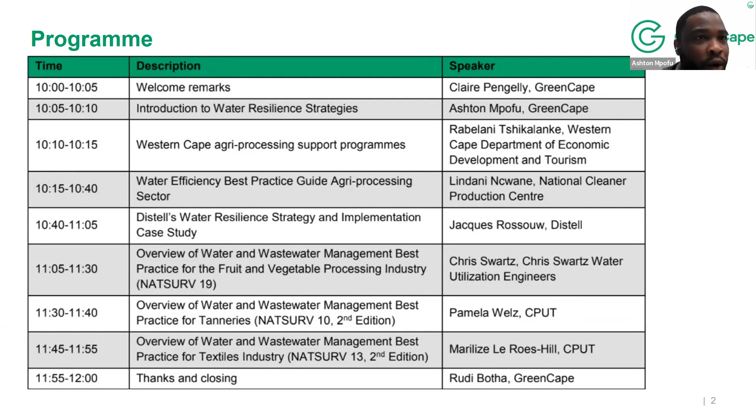Thanks, Claire. I think Claire is having troubles with the connectivity, so maybe let me kickstart my part. Good morning once again. My name is Ashton, and I'm also a water analyst at GreenCape. So I'll be taking you through what we have termed the water resilience journey. This is the work that comes from what we did.

Okay, Claire is muted now. So I'll take you through what we have termed the water resilience journey. Okay, Ashton is going. Okay, thanks, Claire, apologies, we have been breaking up a bit. So I just jumped over to start off my session. But thanks once more for the introductions.

As I've introduced myself, my name is Ashton. I'm also a sector analyst at GreenCape. So I'll take you through what we have termed the water resilience journey. This comes from the work that we did during the drought, where we engaged different businesses and encouraged or supported them in terms of how to become water resilient during the drought.

So I'll take you through the four steps, starting off from your far left, which is what you call understand water uses and risk. The journey starts from your left to your right, which is all about low cost activities or interventions on the left. As you go further to the right, the cost increases, as well as the complexity.

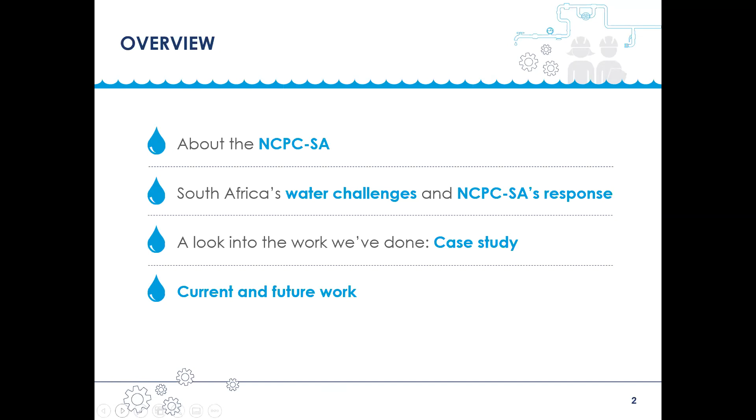Just to give you a background of who is NCPC, we are a National Cleaner Production Center of South Africa. We support South African industry to improve competitiveness and reduce environmental footprint. We do that through implementation of RECP methodologies, as a program of the Department of Trade, Industry and Competition. We are hosted within CSIR, the Council for Scientific and Industrial Research.

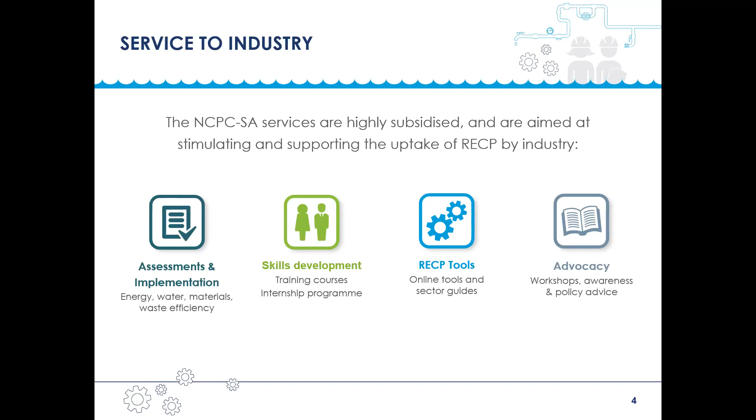The services we offer to industry are highly subsidized, and the aim is to stimulate and support the uptake of RECP by industry. We do that through assessment and implementation, where we get case studies. Also through skill development, where we've developed training courses on various thematic areas. We've got RECP tools which are online, as well as sector guides that we've developed, which are also online. Also through awareness, policy advice, and various workshops.

In terms of the flagship projects that NCPC is driving, we've got 3 areas: water, which is the industrial water efficiency project. The second one is material and waste - we've got a program called the Industrial Symbiosis Program. And under energy, we've got an industrial energy efficiency project.

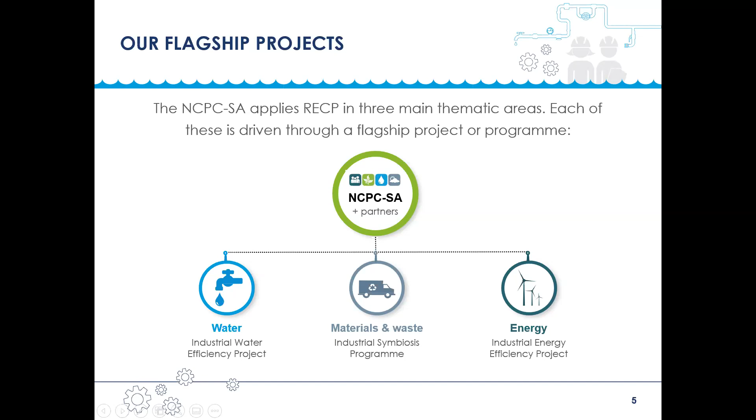I want to take you through the water challenges, as well as what NCPC has done in response. As you know, South Africa is a water scarcity country with extended drought, as well as aging water infrastructure - we've got really a big problem in that. Also, there is inconsistent policy and regulation, preferential effluent charges for high volumes that we typically see, unreliable water supply and quality coming from the water system in South Africa. Also, there is very limited investment in water efficiency measures and programs, and limited knowledge and skills in water conservation, as well as effluent management.

As you can see, what is highlighted on this graph is the cost of intervention. The second one, which is the second cheapest one, obviously is water use efficiency - just like Ashton has shown in his presentation. The first, obviously, is water loss control, where if you can fix water leaks, you can easily beef up your water supply and reduce your cost. As you can see, water efficiency is the second biggest response opportunity after loss control. So that is basically the low-hanging fruit that industries can use.

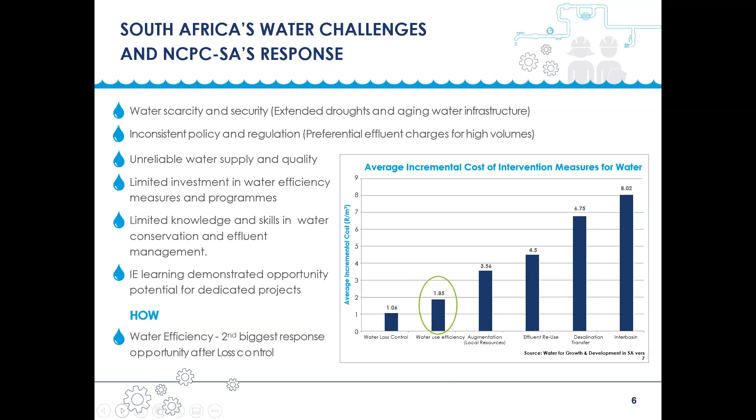Also, in terms of the water challenges and what NCPC has done, NCPC has embarked on creating a project within NCPC. We launched the project early in 2017 with different types of partners.

The program has got 5 areas. The first one is to facilitate and enable policy environment - we've done that one. The second is establishing and promoting the adoption by industry of national and international standards for water management. The third is development of relevant skills to support the implementation of water efficiency through training. The fourth is to support industry plants to implement water efficiency and demonstrate the benefit by doing that. The last one is to deliver focused advocacy as well as awareness campaigns to again promote the adoption of water efficiency by industry.

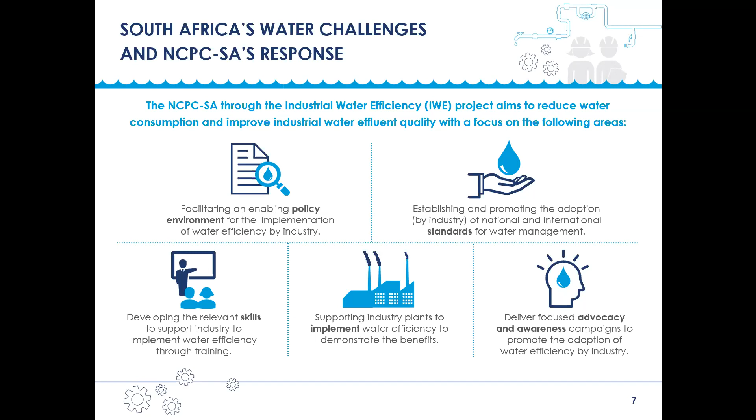So this basically has been our response to this end. We've got delivery partners that we work with: the Water and Sanitation Department, the CSIR, the Council for Scientific and Industrial Research, the Water Research Commission, as well as the Ministry of Foreign Affairs of Denmark. We signed an MOU back in 2017, like I've already mentioned. Also, we've got other international partners, which is the IFC, International Finance Corporation.

So I will just quickly take you through a very good success story in South Africa. Back in 2016, we engaged with a company - they were having quite high water usage. We engaged with them and started to understand exactly where we could offer support. The site details: it's a chicken processing facility located in the Northwest province. They were having problems with increasing water costs, yearly between 18 to 20%, which meant they were really in a tight corner.

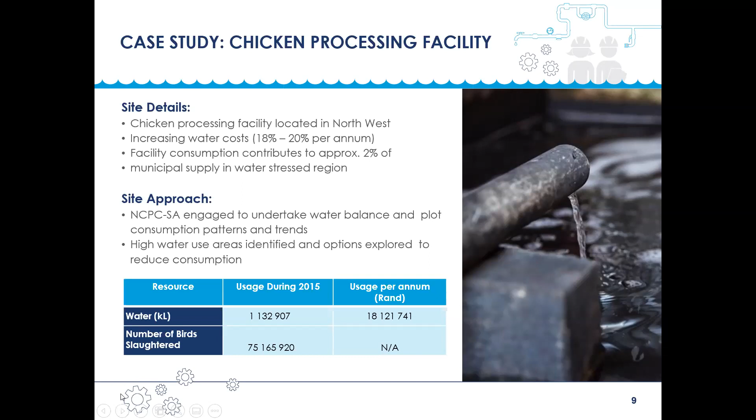For this one specifically, they followed through. The next following year, they implemented 3 of our recommendations, and really did not spend much on capex. They only spent a few thousand within their maintenance budget.

The first intervention they did was the installation of a shut-off valve at one of their sections, and upgraded their water system as well.

After that, they raised awareness within the facility to make sure the water is not left open, and all the leaks are being fixed. They fixed the leaks, especially on the hot water system, and that also helped them reduce their cold water use, and the results were really immediate.

The results were immediate. The last thing they did was, by doing those two, meant they managed to reduce their water consumption by over about 17%. That also meant they managed to reduce their effluent volumes, because they reduced their water consumption for the site.

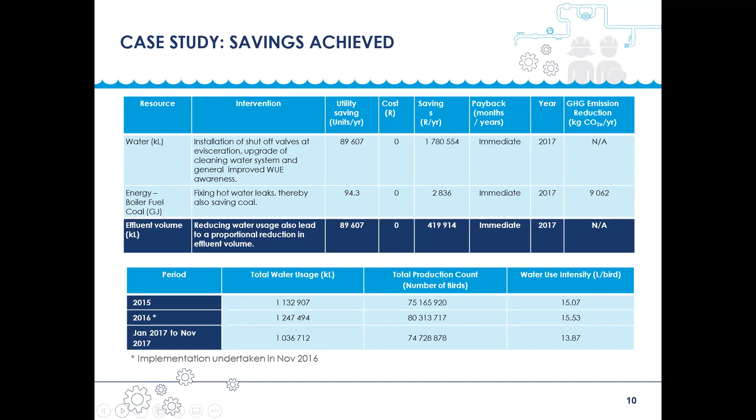Also, their water use intensity improved by 11% within a year, which was a very good implementation by the company, where they followed through on our identified recommendations and reaped the results. Now they've reduced their water consumption and are saving on cost as well, which is very encouraging and shows that our work and intervention really works.

So I'll take you through the current and future work we are working on. As Rudy mentioned, on the 17th, this coming Thursday, we are having an industrial online workshop on the 17th of February. You can register on our website, it's quick, it can take you 3 minutes to register yourself for that workshop.

We'll be sharing with the wider industry all our tools and sector guides that we've developed, which we've already published on our website. The first one is a water audit protocol that we've already published. The second is an Agri-Processing food processing guideline, having 5 common recommendations which can easily be implemented in any sector or business. We'll be sharing that thoroughly in that particular workshop.

Also, we've developed a qualitative water loss logging tool. We'll be sharing that on this day with all the people in industry. The third thing we're currently working on is water training modules. We will develop 2-day end user water training modules that cater for basically anyone in industry, from someone running the machine to even a business owner or CEO of the company.

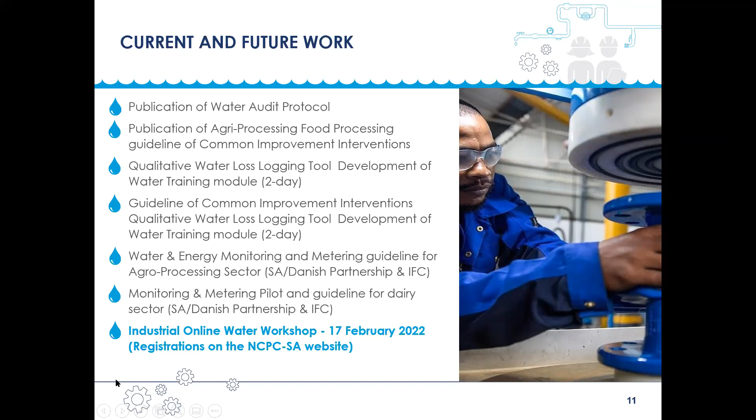Thank you very much, Lindani. That was a fantastic presentation, and we look forward to hearing more about your publications on Thursday. I have one question from my side, then I'll take questions from the audience. A lot of your case studies presented definitely showed a financial saving in each of them. Do you find that's a critical factor in making these water resilience projects successful, or could it be another initiative making it successful?

Yes, definitely, Rudy. One of the things we do when we come into a facility is assist them by plotting for the facility what we call a regression model, where we'll plot a model they can use to predict their water consumption on a monthly basis. That's the first and most critical step - we use the previous 12 months and create a baseline for them. Once we've created that baseline, we'll tell them typically for your site, your base load may be something like 20,000 kiloliters per month, just as an example, that you typically use.

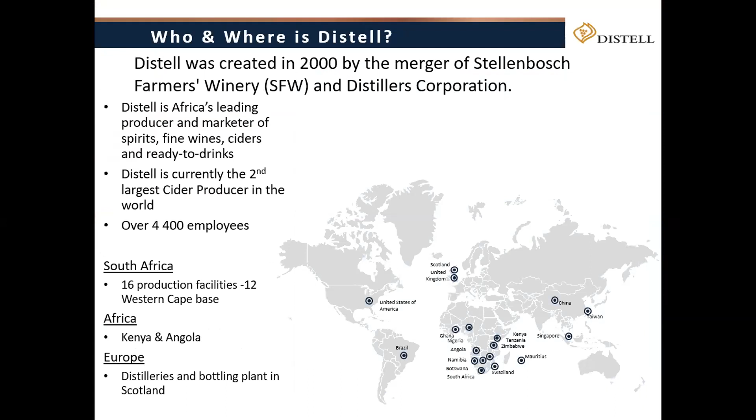So as a start, a snapshot of where we started. The work I'm presenting started in 2010 already, and we started off getting an understanding of what that baseline situation is. At the time, from a water use efficiency perspective, we were using about 4.2 liters of water per liter of packaged product.

Basically going from the point of final packaged products, understanding our processing. We do make wine at a certain time of year, and that product is then kept until it's packaged. So we worked on whatever is the final packaged volume versus what might have been produced throughout the year. So there is some seasonality impact as well.

Some of the initial work we did brought it down to 3.9, and we're now standing target for the end of this financial year just below 3 liters per liter of finished product. We obviously aligned this very closely to the Sustainable Development Goals around water use efficiency and water use.

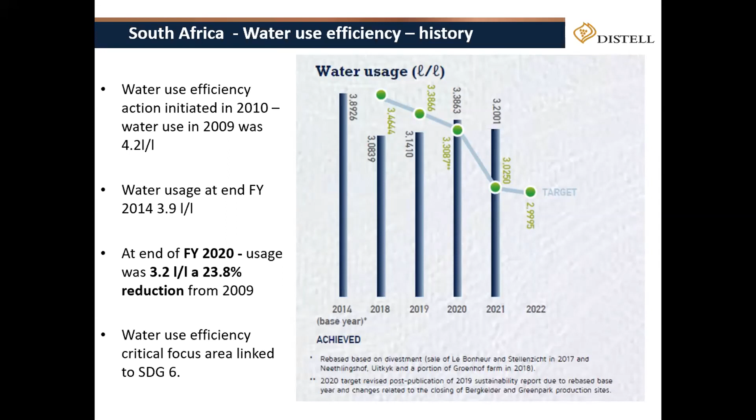So where we started off in 2010 - and I'm going to take you through this journey process we've gone through - we started by putting in a proper monitoring and reporting system. We made sure we have a duplicate monitoring system on our side and aren't fully dependent on municipal measuring systems. We put in centralized reporting systems so that all sites report centrally to our corporate center in terms of water usage.

We did full water network analysis around understanding water flows through the process. We put in sub-metering for areas identified as potential high water use areas, starting at site level, not just comparing a municipal meter to our own meter, but also comparing sub-metering to our own meter to understand where there could potentially be leaks or whatever the case may be.

So the first set of work was getting that baseline, and then from that we started looking at projects. These were typically projects identified internally of where we could reduce water usage, and there's a number of those.

So at the Springs plant, we recycled pasteuriser water use, which is reducing the temperature of the water and allowing it to be reused. There was recycling too - we've got reverse osmosis plants where we treat municipal water before using it in the final product. The brine stream from that is fairly clean, so we use that for washing our floors. If we buy in new bottles, we rinse the bottle before filling it with finished product - that bottle rinse water is again fairly clean, so we use it for washing floors, cooling towers, etc.

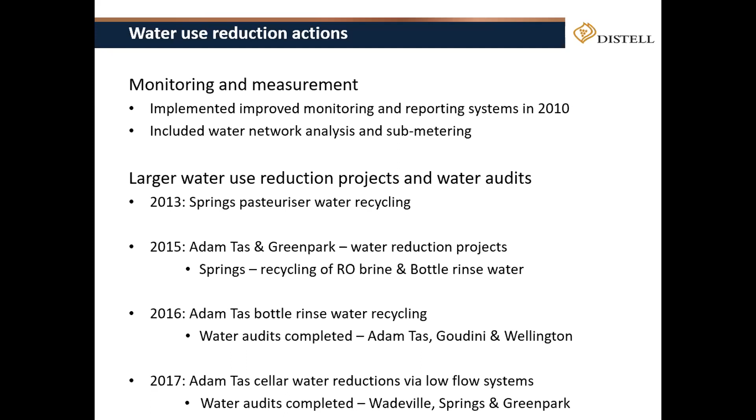And then we did work with - I think Lindani from NCPC also referred to that - we used independent engineering consultants and did water audits at all our major sites, effectively using the data we'd now built up, going through each process and almost getting a new view of where potential opportunities existed, to look at further opportunities to reduce water usage and for in-process recycling.

So we did some work with WWF, looking at the water risk of our different sites and understanding on a broader scale what is the risk of interruptions to water supply, both in terms of drought, precipitation and water availability, but also understanding where potential risks are in terms of municipal infrastructure and interruption of supply from that perspective.

Then we continued when we were in that sort of day zero drought scenario in the Western Cape. There was a lot of work done around further improvements, firstly in terms of reducing water use at those sites. So at our largest site at Epping, we had to temporarily relocate production. We put in closed loop cooling systems at one of the distilleries. We did major work around awareness programs.

We completed additional water audits at 2 of the sites, so we've basically done water audits at all our major production sites. We've developed a list of opportunities or projects at each of those sites, and on an annual basis we align that with our capital budget application process and implement those projects progressively at the different sites. That implementation program is also aligned to our annual water improvement target process, so projects identified for implementation will on a corporate side and on the site side lead to reductions for those specific sites.

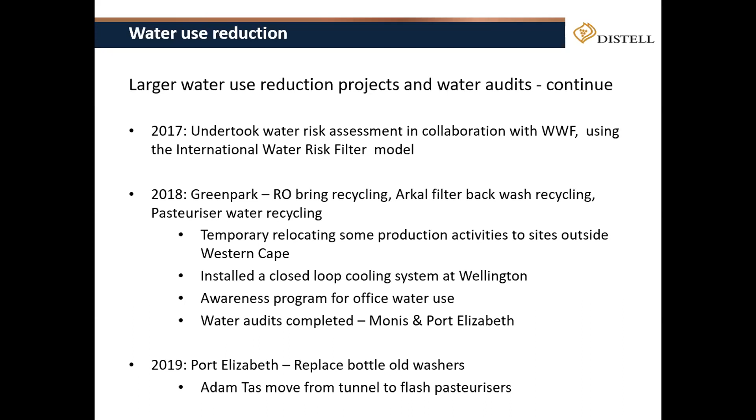And there was a question now about drought. The Eastern Cape is currently facing severe drought, so there's a lot of work we're doing there in terms of replacing old infrastructure. Old bottle washers have been replaced, and we've just completed a project where we're using the final rinse cycle from the bottle washers, putting it through our RO plant and reusing that back into the bottle washers again - that in-process recycling opportunity. That work is continuing at all the sites.

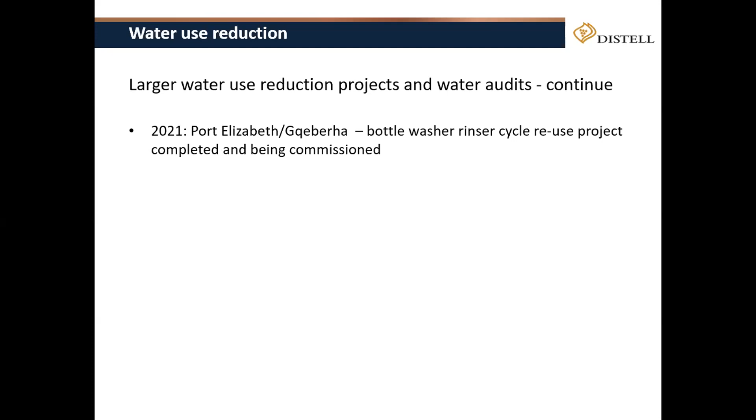But if we look at the Western Cape drought situation, the one advantage we had was that because we had started working on water use efficiency in 2010 already, we already had a fairly well-established baseline. We already had done water audits at the key sites. So when it became a regulation to reduce our water usage by 45% against 2015 as the base year, we already had a very good understanding of where those opportunities were.

We could fairly quickly implement potential process changes. Obviously, engineering interventions would require time for implementation, but because we already identified the project and there was already an indication of a cost element to it, we could pull projects forward and fairly quickly get approval for the capital to implement those.

So if we looked at all the different opportunities, firstly looking at internal reductions - although a lot of work has been done already - we started looking at alternative water sources, that included drilling of bore holes, safe yield analysis, application of water use licenses, water treatment processes, in addition to making sure that the water complies to our drinking water standards and internal product standards.

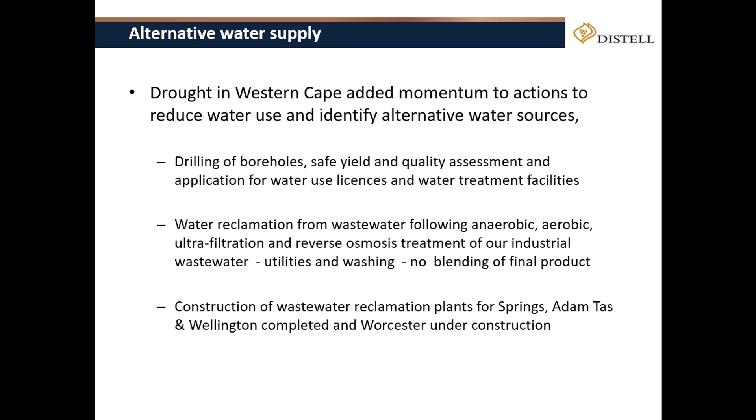We've gone through the process of completing full installation, level loggers, water meters, and started doing external quarterly monitoring reports for each of those boreholes. Based on the safe yield assessments and those quarterly monitoring reports, we've amended our management processes.

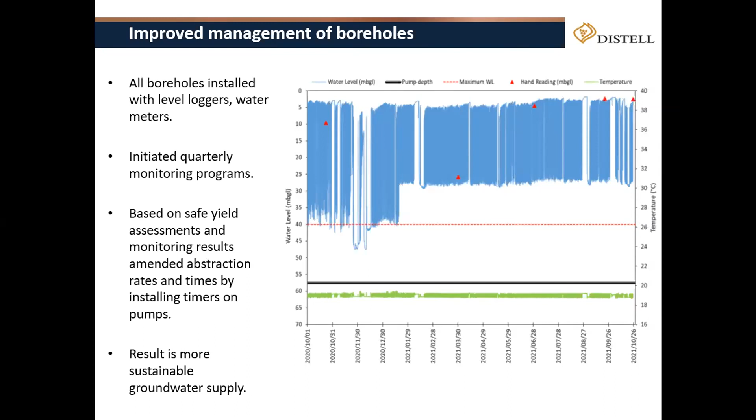We implemented these interventions not just at sites with a licensing requirement. We've now standardized this also for sites that were, in old terms, existing lawful use. So this is a standard practice now across all our sites where we have boreholes. We don't see boreholes as an unlimited supply - we try to manage it within the confines of what the resource can deliver for us.

So just two summary slides to finish off with. On a strategic level, the process we went through combined an evaluation of each site in terms of demand and existing supply or source of supply. We looked at potential alternatives - this is almost the more finished product - and we looked at opportunities to transfer water between sites. Remember, I'm not talking about the period when we were in the drought situation. We looked at opportunities for transferring water between sites, and we had to apply for water use licenses to give effect to those opportunities.

We looked at reclamation of wastewater, new boreholes - for each site we developed a site-level understanding of the situation. We combined this with results from the water risk filter work we had done, and then started implementing changes to ensure each site, from a risk perspective, has a more sustainable water supply program.

This gives us a one-slide summary of where we stand across at least the Western Cape and Eastern Cape sites. Obviously a lot of work has happened since this, so it's not the final version, but it gives you an idea. Each site we went into a fairly detailed analysis of that situation, and we keep doing this as part of our business continuity program.

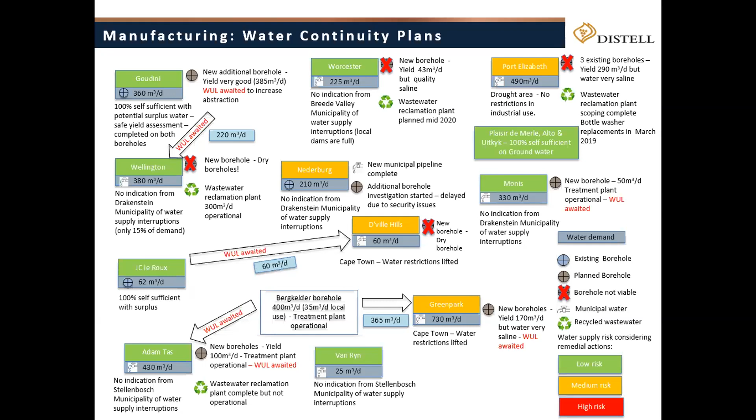From a Western Cape perspective, as I mentioned before, there was a specific legislative requirement to reduce our water usage by 45% against our 2015 base year. At the time we did a full analysis, understanding each site, the source, and the demand, and compared this to what sites had received from the Western Cape Municipal Supply System, or at least linked to it. We also looked at this across the Western Cape as a totality.

And as you can see, we were able to get to 45% against water supplied from the Western Cape water supply system, versus a total of 40% across the whole of the Western Cape. So a lot of successful work has gone into this process.

But I think the key thing for me is the fact that we had started early. If we had started this process by the time the drought was already in place, we would definitely not have been as successful. So I think that's maybe the one key thing to take out of it: don't wait too long until you're almost in trouble already, but start early with this.

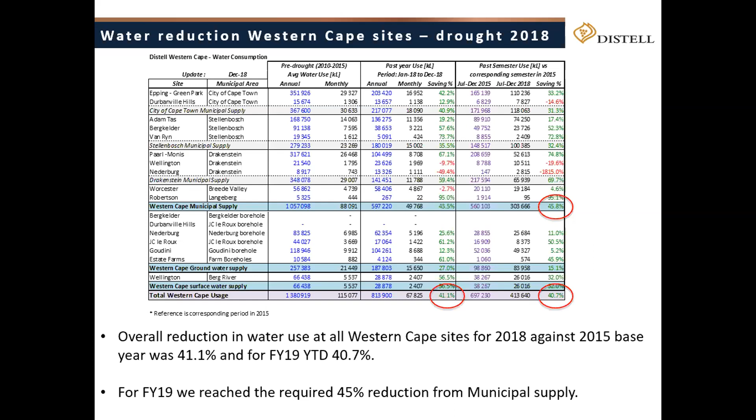There is a long-term planning process that takes place, and the benefits, both from a water use perspective and obviously a cost-saving perspective as well, does add value in the long term.

So I think that's my time. Thank you very much. I assume if there's any questions, please feel free to ask.

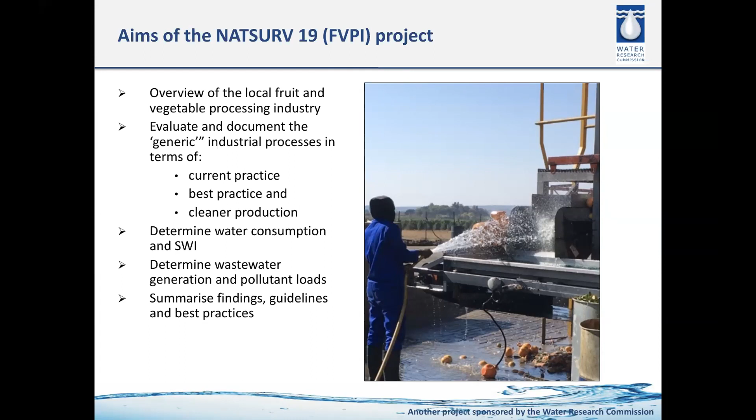We then had a look at wastewater generation. What does the wastewater of this industry look like, and what loading does that represent, and what is the effect on the environment? Basically to summarize all of this in terms of findings, guidelines, and best practices.

So 3 products came out of this WRC NATSURV project. Firstly, the WRC NATSURV document. Then we had master's theses by our students as part of building this industry knowledge, at Stellenbosch University, the students being Pierre Volskenk and Christian van Schalkwijk. Pierre focused more on the water use side, whereas Christian looked at the wastewater side, characterizing the wastewater and looking at treatment processes.

Just to put this in context, in the industry, fruit and vegetable processing comprises about 8%. What we have in fruit and vegetables includes canned fruits, canned vegetables, frozen fruits, dried fruits, and juices.

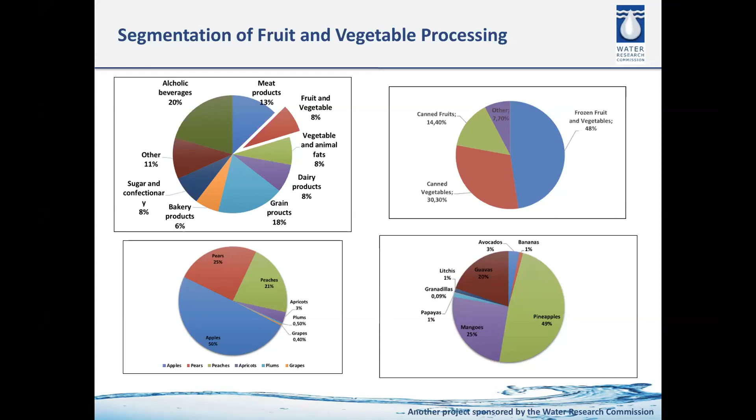On the left-hand side, some percentages: apples make up about 50%, quite a big industry, and we have that in the Western Cape to a large extent. Apricots, plums and so on a bit less. Then some other types of fruits - avos, bananas, pineapples - quite a big industry in East London, also some activity inland, but we're not covering that in the NATSURV. Then some other fruits like mangoes, papayas, etc.

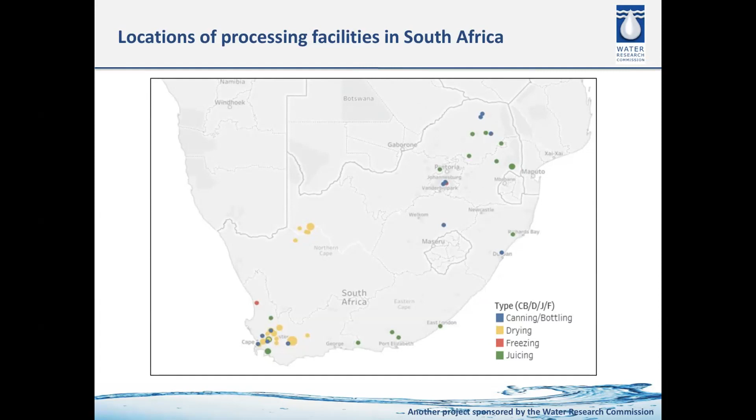We had an introduction from a speaker on environmental planning and tourism. They did a report on this industry, together with the dairy industry, which were quite well covered. We had engagement with them and included some of their information in our NATSURV. It was a valuable study done by the OABS company based in Paarl.

There are a number of fruit and vegetable processing industries in the country, 14 in total. We tried to be representative of all the various types, sizes, and geographical locations of these industries. For 5 of those 14, we had field notes. Then our first student, Volskenk, used a model he customized, where he recorded verbatim interviews and analyzed that, getting very good information he used in his thesis.

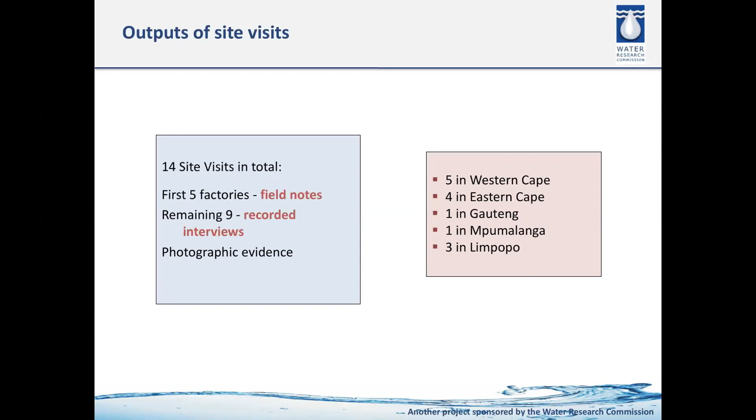Geographically, 5 were in the Western Cape, 4 in the Eastern Cape, 1 in Gauteng, 1 in Mpumalanga, and 3 were in Limpopo.

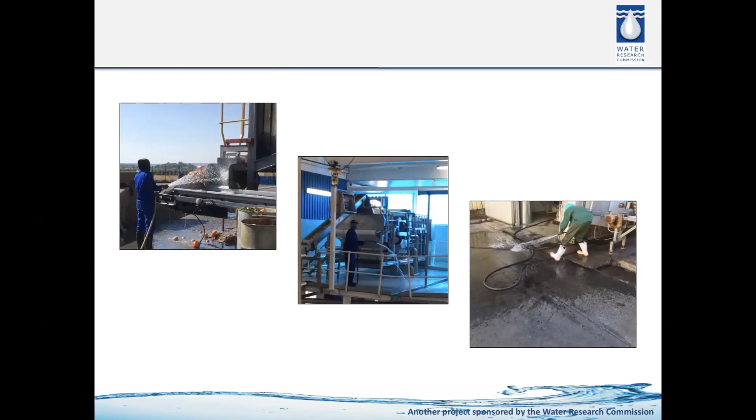This is just some pictures of what we took, showing good practice using a normal hosepipe to clean up. Some on the water treatment side, ponds that they use, some ponds looking better than others, depending on where the industry is located.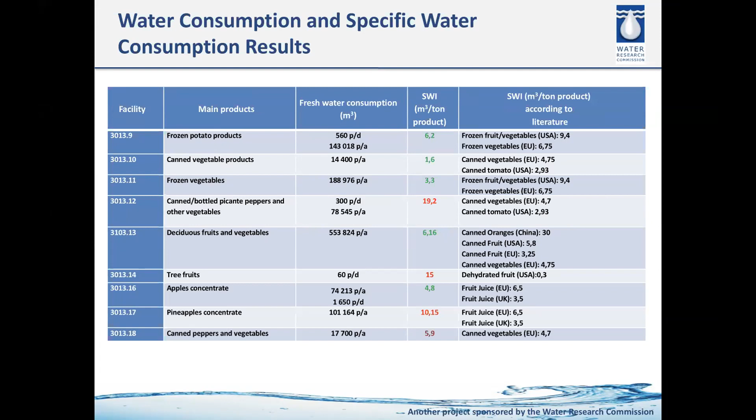On the right hand, we looked at what was in the literature as well, mostly the international literature. We also looked a bit at what was in the previous NATSURV study done in 1991, the first one.

Just want to grab a drink of water.

In terms of the wastewater, you can see it can have quite a high organic load as measured by chemical oxygen demand. Citrus concentrate, second from the bottom, goes up to 21,000 COD. So you would expect some treatment to be necessary, often an anaerobic digestion step to get rid of the main COD load before any further treatment.

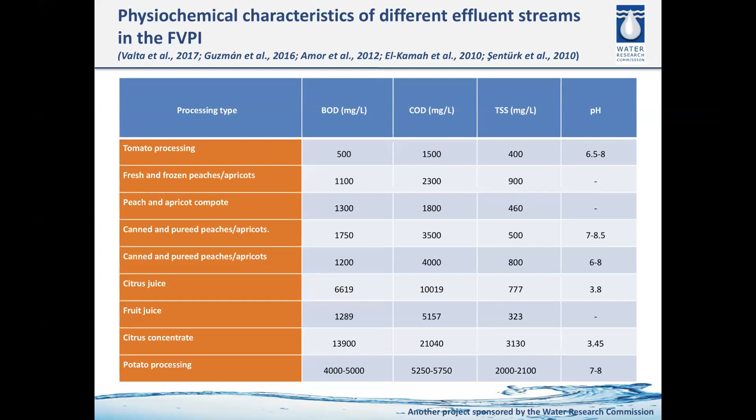Screening is used quite a lot to get rid of the peels and things like that. The pH can fluctuate quite a lot, but more towards the acidic state, so some pH correction would be required as well.

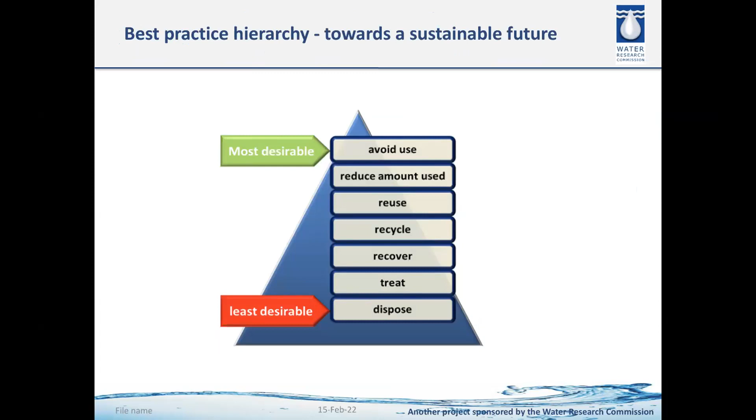This fits in with what was presented earlier by NCPC in terms of your hierarchy, looking at options that you have from the least desirable to the most desirable, but that's just basically for background.

Some of the key findings on the industry: there's a strong export-orientated approach. More than 50% of this fruit and vegetables are being exported. There's a lot of growth in the Africa market with exports from the country.

The industry is highly competitive and concentrated in nature. We had to sign NDAs for most of the industries that we visited. There are a few key players accounting for large portions. For instance, the pineapple industry in East London is the only big one in the country, and there are a number of large players.

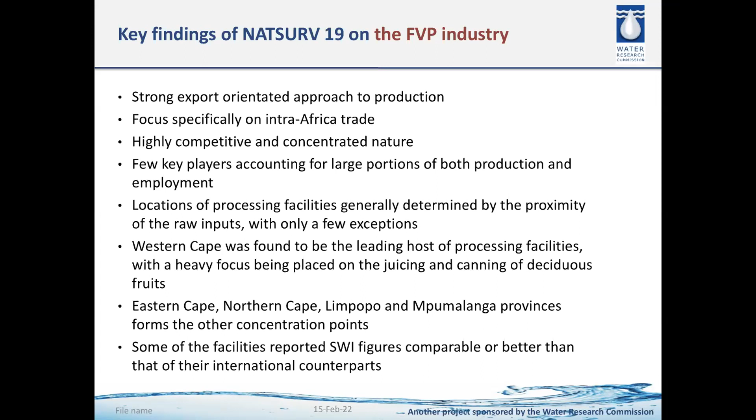The locations are generally determined by the proximity of the raw inputs, but also water availability. You would find facilities where there's water available. Western Cape is the leading host for processing facilities, and most of the juicing and canning takes place there. I mentioned the other provinces that are involved.

In terms of the future, most of these facilities have long-term strategies for improving their water use, for reducing their water consumption, and that has a lot to do with the price of water. So the economy is very important there, but also the environmental consciousness. Raw material and facility cleaning are the main consumers of water.

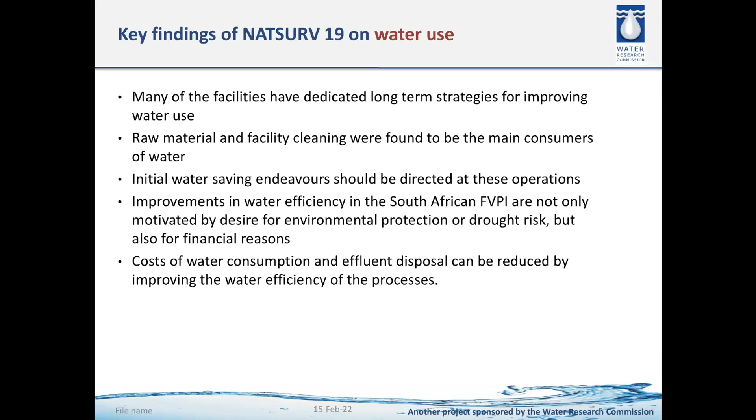I'll show just now some areas where it can be reduced. The Department of Environmental Affairs and Tourism did a lot of good proposals in terms of resilience during periods, because these studies just came out of the 2016-2017 drought, so they're really relevant to dry and water-scarce conditions.

In terms of wastewater management, not a lot of advanced treatment is used. They tend to try to keep it as simple as possible, especially where it's possible to use pond systems, and then you can irrigate with the water, but that's not always done according to best practices. So we have a number of recommendations in that regard as well.

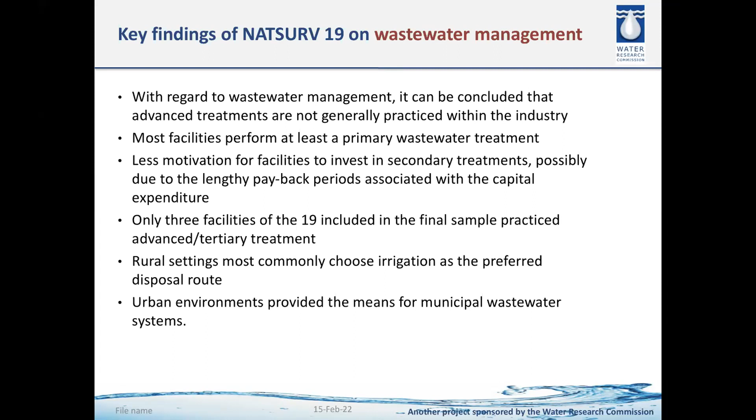Three of the 19 facilities practice advanced or tertiary treatment—that would be like membranes and very fine filtration, ultra and microfiltration. As I mentioned, rural settings most commonly use irrigation as the preferred disposal route.

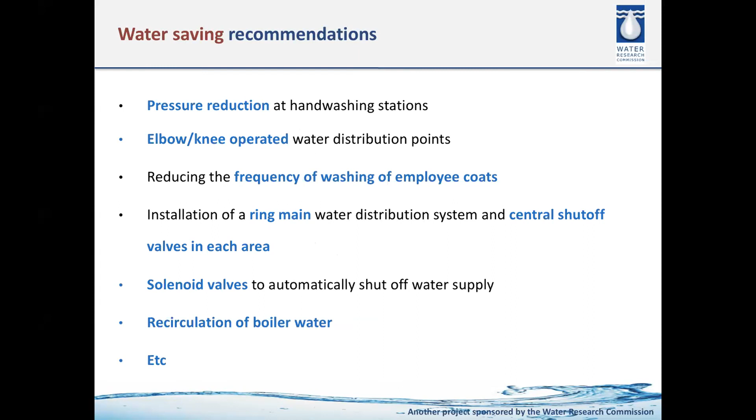Some water saving recommendations for the industries: pressure reduction at hand-washing stations, since a lot of water can be wasted there. Elbow or knee operated water distribution points, frequency of washing, ring main and central shut-off valves. But in general, I would say just look at how you can wash better.

But we know that the quality of reused water can be made as good as you want. It just costs more, but you can provide very good quality industrial water for use. That's something where the perception needs to be overcome.

Water augmentation options should include desalination of seawater, so if you're close enough to the sea, you can do that. Bear in mind this comes with some cost for the reverse osmosis as well.

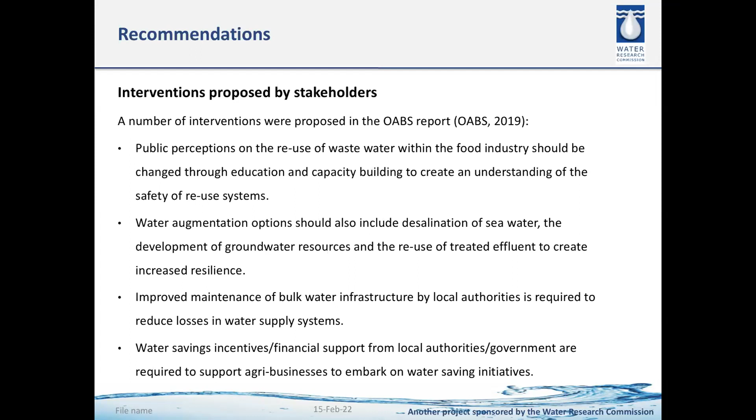Water savings incentives and financial support from local authorities are required. There's much lacking at the moment, and I think a lot can be done in that area. A bit later, in some of my final slides, I suggest that as receiving further attention and research.

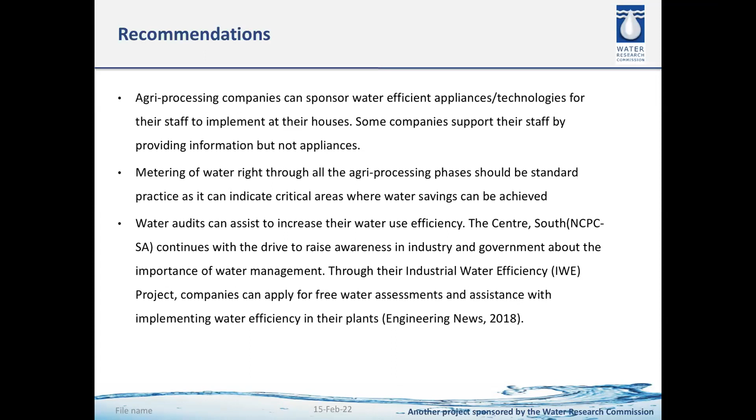Agri-processing companies should sponsor water-efficient appliance technologies. Here I can mention the very good study that GreenCape did about two to three years ago, headed up by Jen, looking at all the industries in this sector for areas of improving both water use and water loading reduction. I also mentioned earlier about NCPC doing very good work, as was presented earlier this morning.

So the way forward, a number of aspects affecting the fruit vegetable processing industry in the country need to be addressed. Since the last project, the pandemic has come our way, and obviously this has had a lot of effect on the industry as well. So that should be looked at.

We should look at low global pricing pressures, especially on the export market, what is required in terms of water use indices and wastewater loadings.

What do you do during droughts? The Department of Economic Development report is very good in addressing all of those in appendices, in tabular form. Impact of poor economic periods on the industry basically went hand in hand to an extent with the droughts.

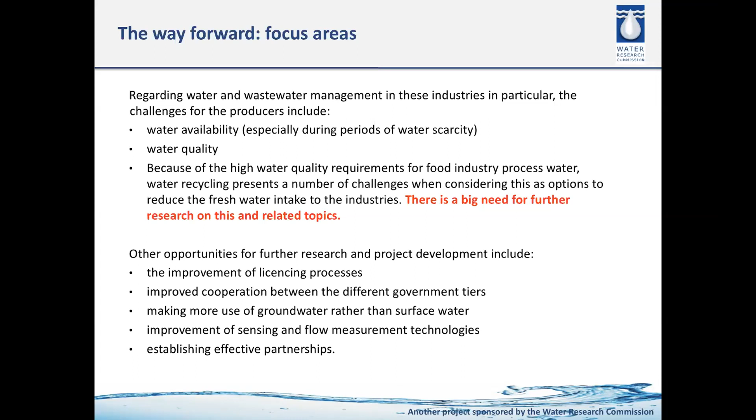Improvement of sensing and flow measurement technologies - I can't overemphasize that, so that management can really get a good handle on what happens in terms of your water balance, your water usage, and so on. Then finally, to establish effective partnerships.

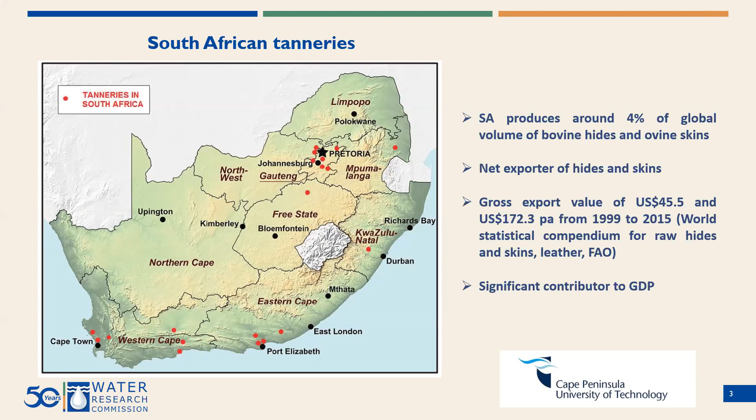Unfortunately, the tanning process is seen as highly polluting, and this is why most tanneries are now located in developing countries, because tanneries struggle to comply with environmental standards in developed countries, for example in the European Union.

Most hides are still tanned using the wet blue process, which is reliant on chromium. Other processes do exist, but there's normally a trade-off on product quality, and obviously product quality is paramount.

Trivalent chromium that they use is not itself toxic, but there's always a possibility of it becoming oxidized to the carcinogenic hexavalent form in the environment. And the danger of hexavalent chromium - I'm sure you've all heard of Erin Brockovich, the movie, or seen it when you're a bit younger - it was based on the contamination of groundwater in a small town in the USA with hexavalent chromium.

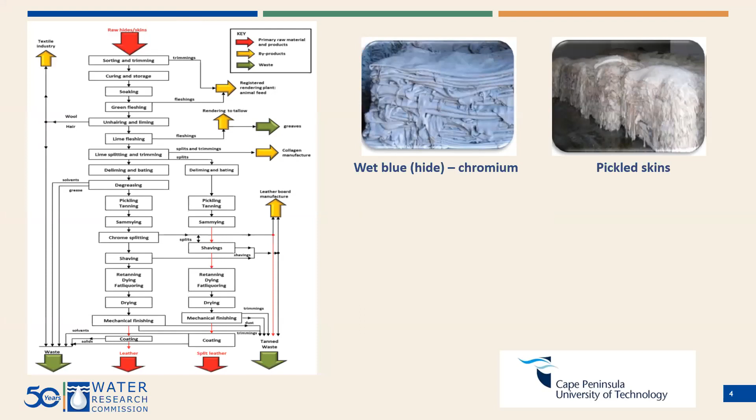So what happens when the hides come in? For ostrich tanneries, the slaughterhouses are often adjacent to the tanneries, so the skins can be processed as they are. They're known as green skins.

But because meat is a primary product for cattle and sheep, the hides and skins have to be salted to prevent them from drying out and degrading. So the skins are just a byproduct, and the salt then needs to be soaked off before processing, which adds a considerable amount of sodium and chloride to the wastewater.

After soaking, sodium sulfide and lime is used to remove the hair and the flesh from the hides and skins. Next, chemicals are used during deliming and bating to reduce the pH, remove residual chemicals, and soften the hides and skins. As you can see in the schematic, the beam house operations result in high concentrations of salts, organics, and sulfides in the wastewater.

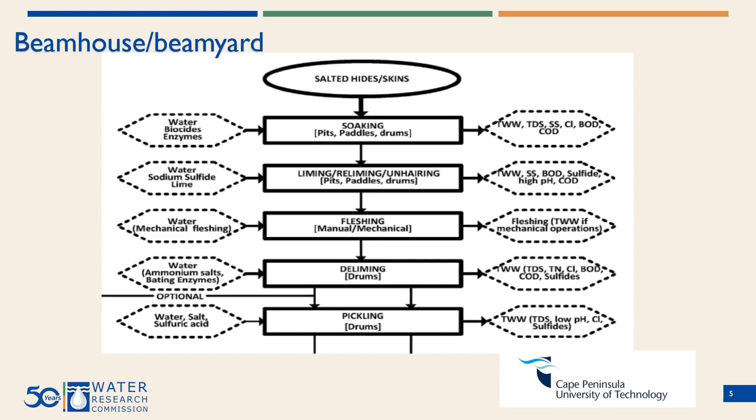So it's quite a problematic wastewater to treat. As far as the tan yard processes go, chrome tanning, as I said, is still preferred for hides, so the effluent contains chromium, inorganics, and dyes.

Vegetable tanning has been brought in, and it's hoped to replace chrome tanning in the future, but it still needs some development so that the finished product is on a par with the chrome tanned hides. In contrast to chrome tanning, sheepskins are pickled, using salt and sulfuric acid - no nice chemicals at all are being used.

So no matter what the route, the effluent from tanning and dyeing contains a range of inorganics and dyes. What's going on here?

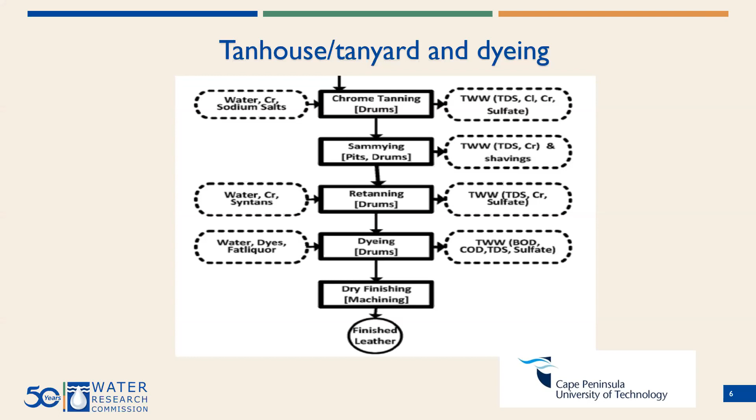So often, actually, there's no chromium in the final effluent, and sometimes the chromium is actually recycled. Then the sulfides are also oxidized, because you don't want to have high sulfide concentrations in your effluent.

The liquors are then generally combined and treated, normally using the conventional activated sludge process. Unfortunately, it's prone to upsets because there's very high fat content leading to growth of filamentous organisms, and you don't get very good settling.

The wastewater is treated, the sludge is dried, and it's sent to landfill at considerable cost. But depending on the characteristics of the sludge itself, there are opportunities for beneficiation.

One tannery I know of is actually looking at experimenting with composting. And we've also co-digested sludge - it was actually part of Ashton's PhD or his master's project, looking at co-digesting to produce biogas.

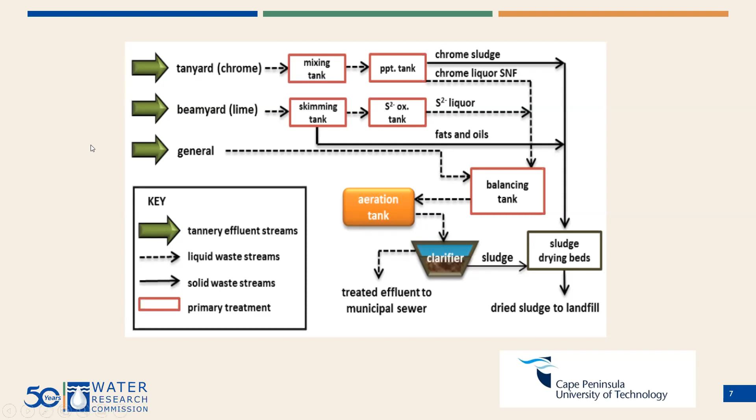So in most cases, the treated effluent is discharged to sewers, where it's treated in municipal wastewater treatment works. But in some cases, it is discharged directly in marine outfalls. And depending on the local municipality and the route of discharge, the standards vary quite considerably.

As you can see here, we've got City of Tshwane, City of Cape Town, Nelson Mandela Bay, Ekurhuleni, Oudtshoorn, and Mossel Bay. There are some tanneries in Oudtshoorn and Mossel Bay, ostrich tanneries. It just obviously depends - for example, in Mossel Bay, the final effluent from the wastewater treatment works goes to quite a highly sensitive area where there's a lot of Bushman paintings, so they don't want high salt content. So it's quite difficult for them to comply with that.

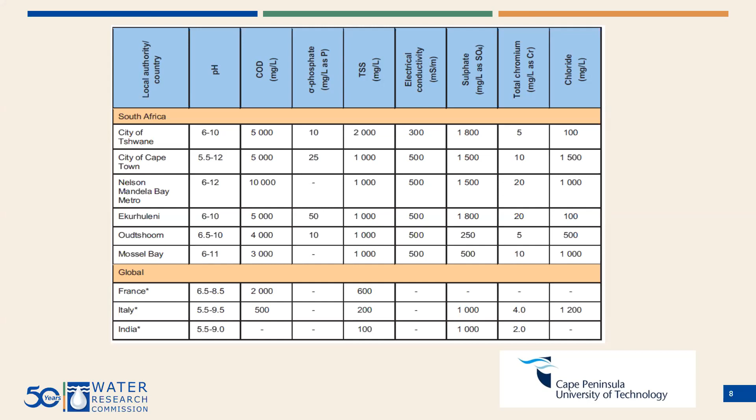And then in the NATSURV, we also looked at the specific water intake, as Chris was saying that he did with the fruit and vegetables. So in this case, it's how much water they use per hide or skin produced. There's quite a considerable variety, but we compared very favorably with the European standards. It's probably because we're a more water-stressed country and are trying to use as little water as possible, but it was encouraging.

And from all of the data that we obtained, we formulated some proposed water use targets: 50 to 150 litres per skin for wet blue process stages, 100 to 200 litres per skin for dye house process stages, and then a total of 200 to 500 litres per skin. This obviously just depends on the processes being used and the types of skin, and that's why you've got such a range.

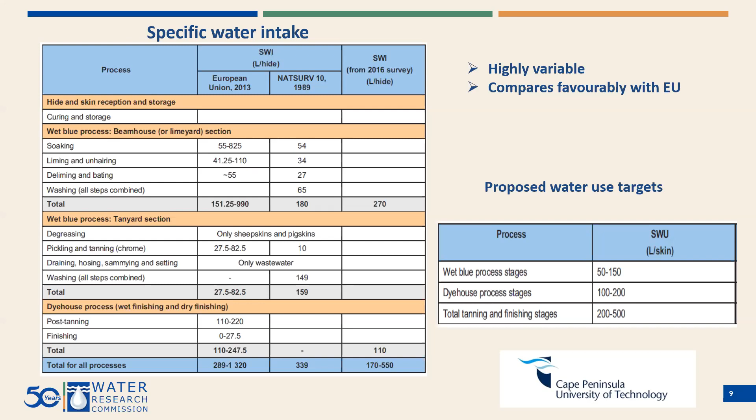As far as for water resilience, for opportunities for recycling, the wash water from before deliming can be reused as wash water after liming, which in turn is used in liming. This is denoted over here by the green arrows. In addition, the pickling and tanning water can be recycled in a closed loop, shown by yellow arrows on the diagram.

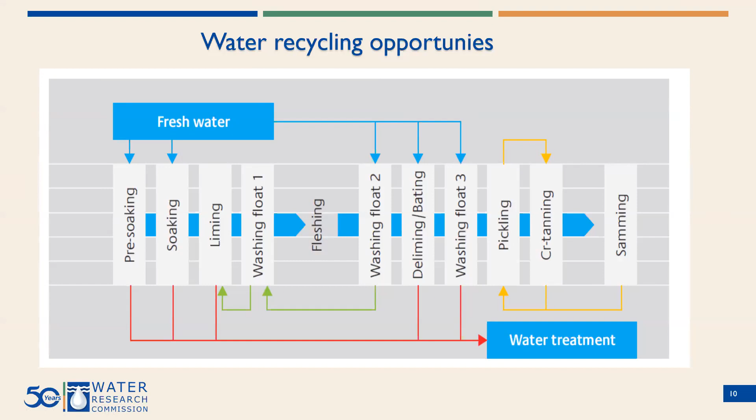And it is a very difficult effluent to reuse because of all the chemicals. So you can't have consistent reuse except for the closed loop with the pickling and the tanning. So the water resilience in the industry goes hand in hand with the adoption of new processes to make the wastewater less toxic and more amenable to recycling.

As one would expect, considerable efforts are being dedicated to making the tanning process more environmentally friendly. While many of the more sustainable processes look very good on paper, they still need to be adopted by the industry at large. The most notable example, once again, is the use of vegetable tanning agents instead of chrome. Other examples include replacing some conventional chemicals with enzymes and biodegradable surfactants. Additives have been developed recently to allow low sulfide unhairing and ammonium-free deliming and bating.

Some studies have also been conducted with the use of seawater instead of potable water for some of the beam house operations. But in conclusion, I just want to say that in order to adopt more sustainable technologies, all these new processes and chemicals need to be tried and tested, and it really takes a lot of time, effort, and money. So the EU standards for importing are becoming more stringent, and this does put pressure on leather exporters. But I do think that environmental incentives from the South African government would also assist the industry to become more waste and water resilient.

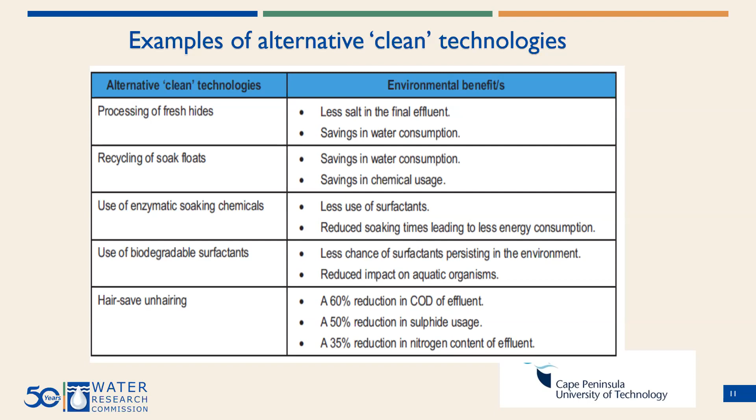Thank you all for listening. I've only been able to skim the surface of the topic at hand during a very short presentation, but you can download all of the NATSURVs from the WRC website free of charge if you require any more information.

Thank you very much, Pamela, for that introduction to the NATSURV. I was just wondering, of those alternative technologies that you mentioned on your last slide, which one have you seen the most uptake of?

There is very little uptake at the moment, and we obviously can't name any of the tanneries for proprietary reasons, but one of them is always doing research to find alternative technologies. They've uptaken some low salt processes, and they process green hides as well, which helps because salinity in the final effluent is very difficult to get rid of - you'd have to do RO, but there's always residual organics and fats that would clog the membranes. So it's a particularly difficult effluent to treat.

Anything reducing the salt content helps. There are ways of biologically removing the sulfates and sulfides - we're doing some work on that at the moment, using a biological process for sulfate reduction and partial sulfide oxidation, which gives conversion to elemental sulfur that you can then recover. So there is quite a bit of research being done.

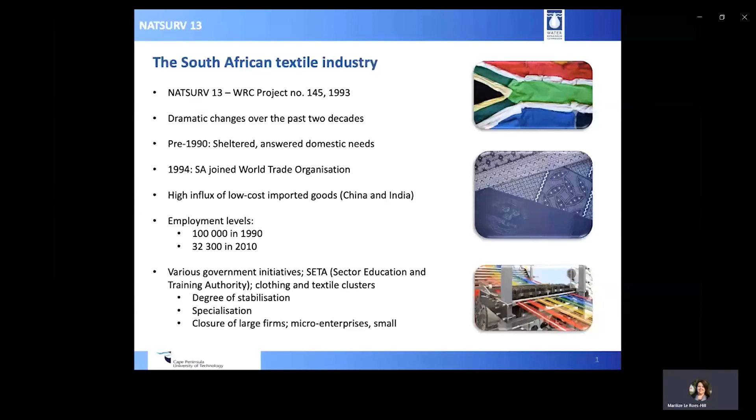As can be imagined, various processes take place in the textile industry, ranging from the processing of raw materials to the production of yarn, woven fabrics, non-woven fabrics, and knitted fabrics. These fabrics and yarn are also subjected to treatment processes such as dyeing and finishing, including processes such as waterproofing or the addition of antimicrobial agents and many more different processes.

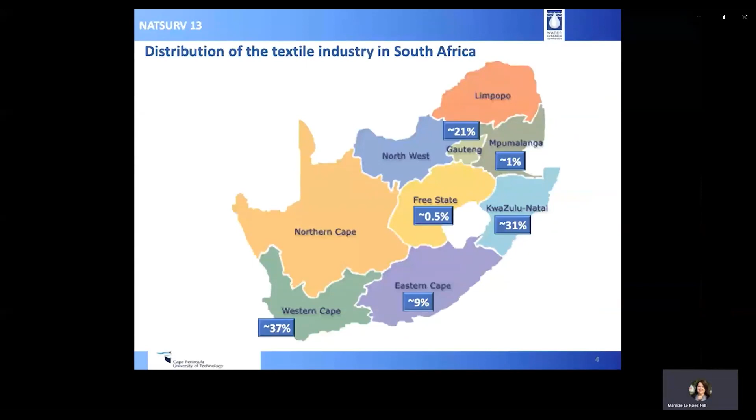Applications of textiles vary from apparel, household products, bags, medical supplies, geotextiles, protective gear, and many, many more, highlighting the importance of this industry in the South African economy.

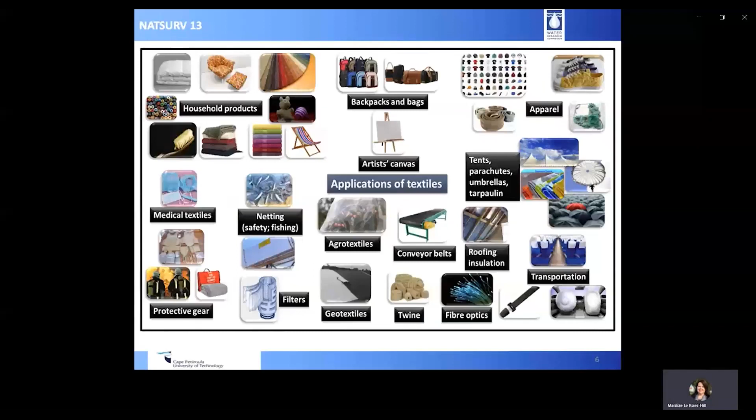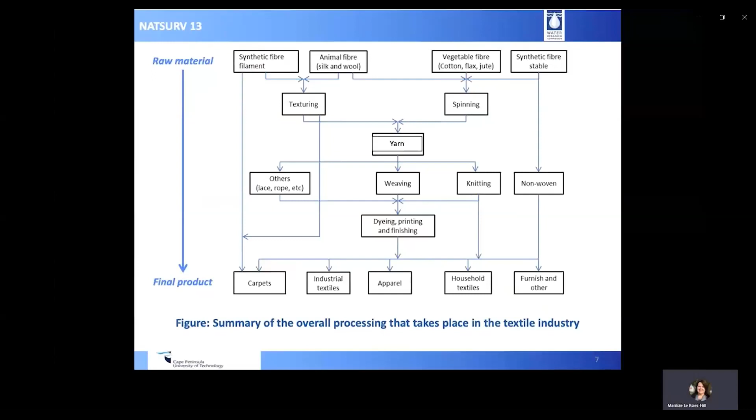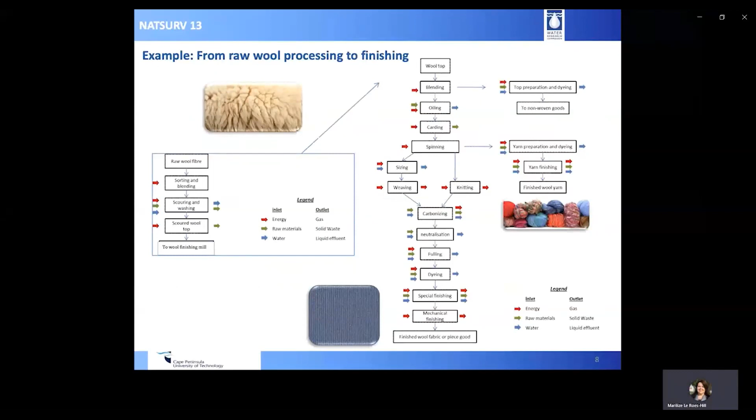It is therefore important for the textile industry to be aware of and to function within national and local regulations, policies, and bylaws in terms of water use, wastewater generation, and waste discharge. Ultimately, the goal is to minimize waste generation, reuse as much as possible, resulting in the reduction and prevention of pollution.

In order to determine whether the textile industry has shifted its focus towards resource protection and improved waste management practices, a national survey was performed. The starting point involved developing a database of all textile manufacturers, a site visit questionnaire covering water use and waste management practices, and an online survey targeted at non-respondents of requests for site visits.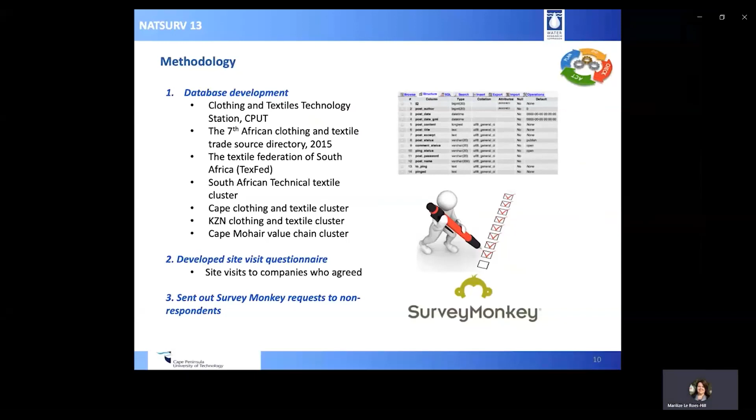The companies who participated in the survey could broadly be grouped according to the main processes that take place: dyers and finishers, indicated by the abbreviation DF, producers, P, and technical and traditional textiles, or TT.

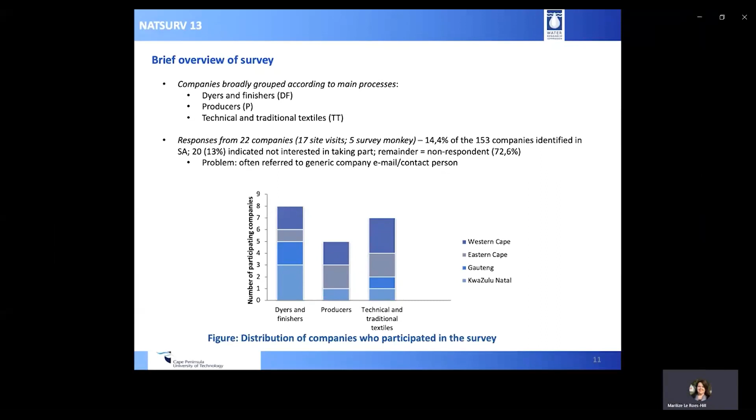Of the 153 companies identified in South Africa, only 22 responded. 20 indicated that they were not interested in taking part in the survey, while the remainder never responded to any requests. As can be seen from the graph, the 22 participating companies were fairly representative across the provinces and the type of textile processing.

In these next few slides, I'll focus on water use, best practices, and an example of a success story. Starting with the water source, the majority of the companies indicated the use of municipal water, while only 2 companies make use of alternative water sources in addition to municipal water.

Company DF1 also makes use of river water, but needs to pre-treat it prior to use, while company TT2 makes use of dam water without any form of pre-treatment. Company TT7, a producer of conveyor belts, indicated that they pre-treat the municipal water prior to use.

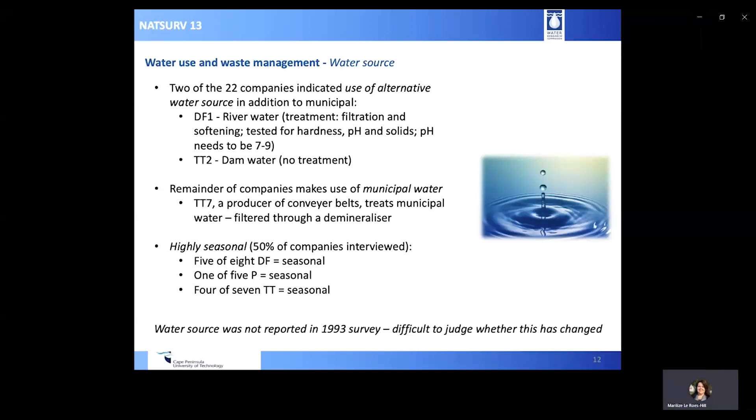Approximately 50% of the companies indicated that the use of water varies from season to season, while others have a constant water usage throughout the year. It is therefore not surprising that the specific water intake will vary dramatically depending on the type of processes and materials used by the different companies, and as such, individual textile companies should aim to establish their own targets for improvement of their specific water intake rather than trying to conform to a national average value.

In 1993, the average specific water intake was reported to be 137 litres per kilogram of fabric, while in 2016 the average was calculated to be 47.8 litres per kilogram of fabric, a 90 litre per kilogram reduction. This may also reflect the shift of the industry towards more specialized textile production that makes use of more efficient technologies and equipment, resulting in the overall reduction in water use.

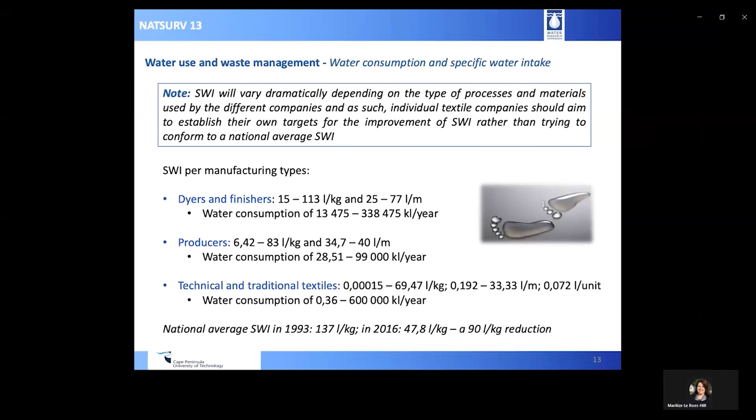This then leads us to the various best practices employed by the textile industry in South Africa. The majority indicated the use of water-efficient processes and equipment, constant repairs and monitoring of valves and leaks, as well as continuous optimization of any processes requiring water. Other best practices include reuse of processed water, recycling of cooling water, reduction of the number of process steps, and of course turning off running taps and hoses.

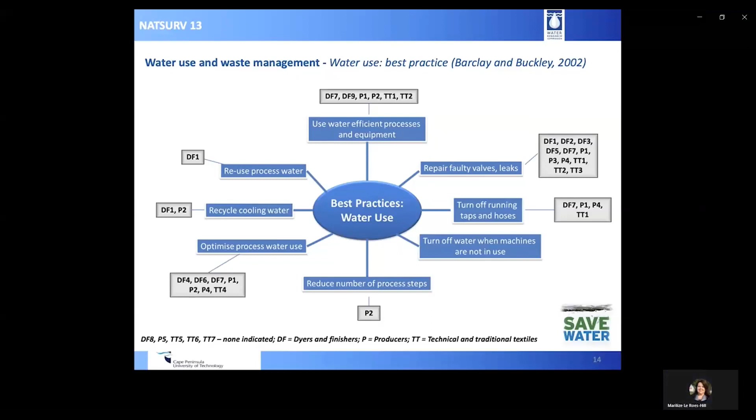Here is an example of a success story. Company DF1 is an example of how implementing best practices can influence specific water intake readings. DF1 used to have an SWI of 90 litres per kilogram, but since the company embarked on a water and energy saving program, water use in the production process has decreased to 50 litres per kilogram of fabric.

The production process specifically uses about 140 kilolitres of water per day, of which 75 kilolitres is recycled. Water from the bleaching process is pumped into a tank and used in the printing department to clean screens and wash machines. It should be noted that water consumption and subsequently wastewater generation vary according to the volume of production.

The target is to use about 30 to 40 litres per kilogram of fabric, but they are still trying to find a way to meet this target, as this will depend on the types of fabrics processed. In addition, water use is monitored daily through reading intake every morning and comparing daily readings in order to determine trends, such as changes in consumption per volume of processed fabrics.

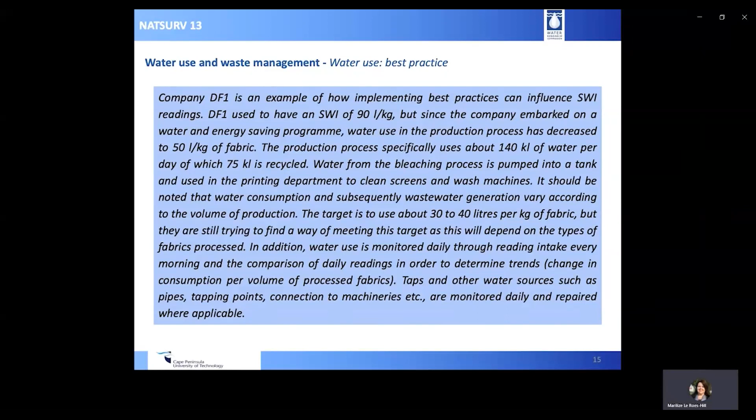Taps and other water sources, such as pipes, tapping points, and connections to machineries, are monitored daily and repaired where applicable. In many instances, 100% of the water intake results in an equivalent amount of effluent generated. Again, this is highly variable depending on the processes used and whether additional water sources are used.

Very few companies indicated that they monitor the quality of the wastewater generated, and basically they are dependent on their local municipality to monitor this. They often do not receive any feedback from the municipality, especially if the readings are within the required parameters.

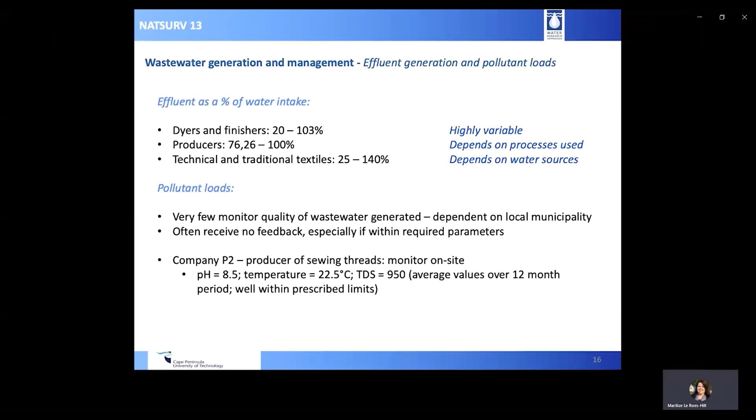Company P2, however, monitored the readings on site, looking at pH, temperature, and total dissolved solids, and their average values over a 12-month period fall well within the prescribed municipal limits.

Looking at effluent management, 3 of the companies indicated the recycling of effluent for the cleaning of panels, 3 indicated the use of a settling process prior to discharge, 1 makes use of flocculation prior to discharge, and another uses filtration and reverse osmosis prior to discharge.

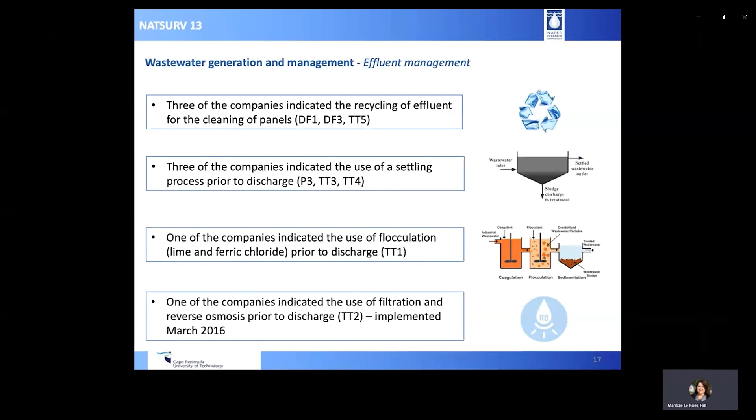Best practices in wastewater management are mostly focused on product and resource recycling, where you look at recovering residual printing pastes, collection of grease from scouring processes and selling that off, using rinsing water for cleaning, and recovering potential resources from the wash effluent.

The use of new technologies and equipment, such as equipment with automatic controllers, use of enzymes or liposomes, and the combination of processes through new technologies.

Chemicals selected for use, looking at the use of biodegradable chemicals and chemicals that have reduced toxicity, or even breakdown compounds of these chemicals that have reduced toxicity.

And then looking at good management practices such as process optimization, working towards the zero waste concept, and production by color.

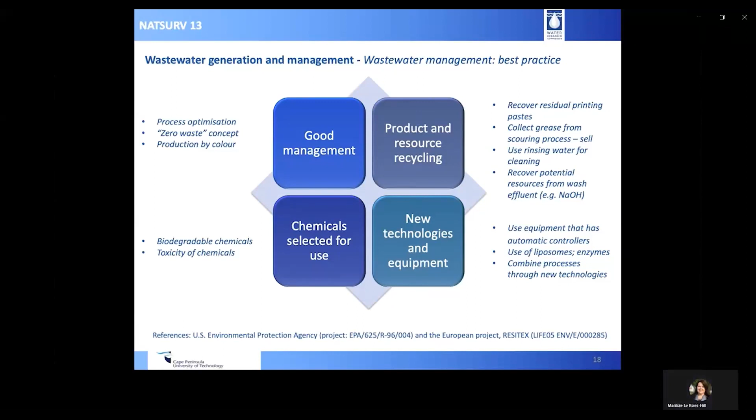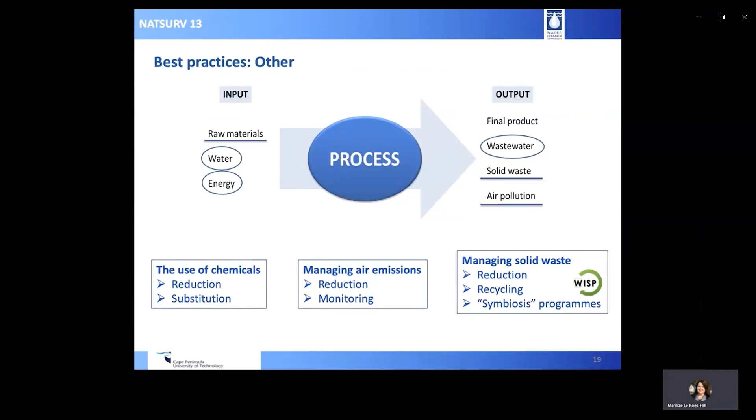Best practices reported by the participating companies included the reduction of chemical usage and/or substitution for less toxic chemicals. They also look at managing their air emissions in forms of reduction and monitoring, as well as managing their solid waste by moving towards reduction, recycling, or taking part in symbiosis programs, as can be seen in the following success story.

Company P2 set itself a zero landfill objective. In 2001, 825 cubic meters of waste had to be removed from the company at a cost of 136,800 Rand. By continuously trying to find ways of minimizing and repurposing their waste, solid waste collected in 2014 was down to 25 cubic meters, and was removed at a cost of only 2,952 Rand, a 98% reduction in cost.

The company recycles glass, metal, plastics, and cardboard, the proceeds of which go to a nearby school, and they support initiatives such as Beads for Africa.

Part of the company's success can also be attributed to its participation in the Western Cape Industrial Symbiosis Program, or WISP, which encourages various companies from different sectors to connect to determine whether unused or residual resources from one company can be used by another. This initiative has not only resulted in economic and social benefits, but has also decreased the environmental impact of the participating companies through a drastic decrease in solid waste sent to landfill.

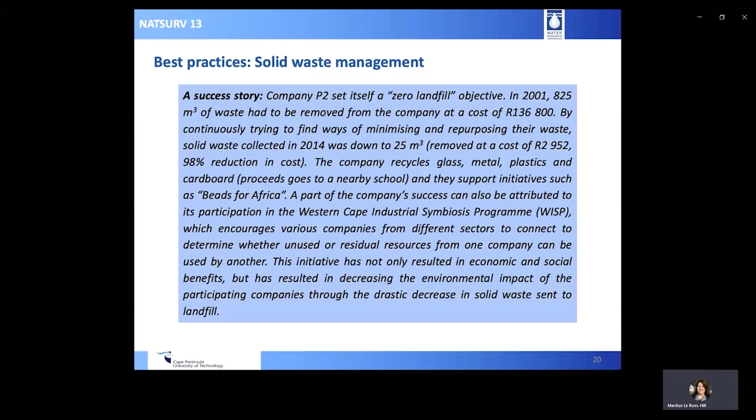Finally, even though energy usage and best practices didn't form part of the 1993 survey, there is a need to understand the potential impact of the textile industry in terms of energy use. The majority indicated the use of electricity in addition to the use of coal, heavy fuel oil, and gas.

Best practices are aimed at setting targets for reduced energy use, the use of more energy efficient equipment, reduced use of coal and gas, the use of energy saving lights, and the supplementation of power requirements with solar power. One company actually indicated that more than a third of their power requirements are met by solar power.

The majority of companies, however, indicated that the use of renewable energy sources is not financially viable at this stage, but they did indicate that over the next 10-year period, they will be looking at potentially investing in renewable energy sources.